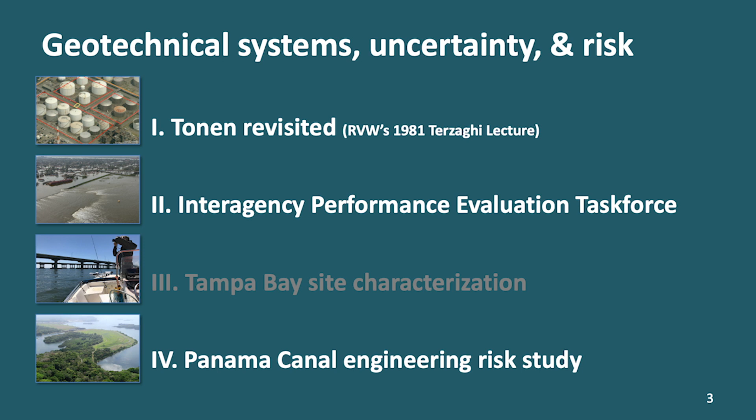And the third one is very recently, the Panama Canal engineering risk study. And the problem there was the canal is a huge, complicated system of engineered works, of capital investments. It faces a number of natural hazards that were unknown at the time of construction, but are now known, and others suspected. And the issue was how are the risks mitigated by operational decisions that the management of the canal can make. And so that was why the Panama Canal Authority was so interested in understanding risks.

So let's talk first about Tonen. So this is a recent picture of Tonen. Those three areas in green are large tank farm areas. Just to put things in perspective, you see these tanks there? Those are 50,000 kiloliters. I did a calculation the last time I gave this lecture. I think that's something on the order of 18 acre-feet, maybe 20 acre-feet. It's a lot. These are big. These things are divided into patios, which are separated by firewalls. There's a huge firewall revetment around the whole outside. There's a whole bunch of drainage.

And the issue is, how susceptible was this site to liquefaction? What was the probability that a loss of product off-site into the bay might happen? And what should the management of Tonen do about it? That is, how much money should they be willing to invest in reducing this risk? Because the risk was large. I'll show you how large in a minute.

And Bob thought we should really do it because he noted that this system of facilities could fail in a whole bunch of different ways. And we can't just go calculate the reliabilities of some footings or some tanks or something. We have to consider the system as a whole to understand the risks.

And so we decided, so I was over with Zenon this morning talking to his fabulous graduate students, and they have their own version of this picture, which I think of as the TVC picture, the threat, vulnerability, and consequence. This is now the standard way to do a lot of big systems risk analyses. It's been criticized in certain areas, but usually not in engineering.

And so we adopted this where the threat was the earthquake and the liquefaction, the vulnerability was the fragility of the tanks and the walls and all that, and then the consequences in this case were mostly fines, actually, mostly environmental fines if Tonen released product. So that got us off on a reasonably solid footing of organizing the uncertainties. That's sort of a theme here.

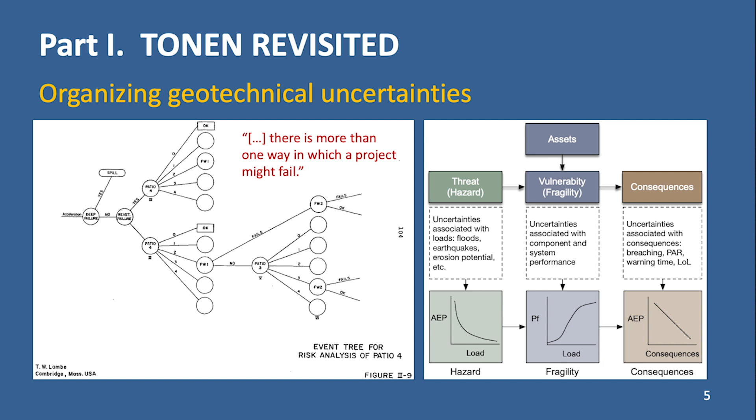The second thing we bumped into, and I think we learned some lessons, was the geotechnical data were really difficult to deal with. This is late 1970s. The only data we had were SPT blow counts, by which, given Harry Seed's work, Bob and others and Mishak were attempting to correlate those to liquefaction triggering. But look at these data over here.

This is the upper fill. This is a hydraulic sandy fill, and this is the in situ native alluvium. This alluvium is not too bad. This sandy hydraulic fill was the bad actor. But look at the coefficient of variation, right? The standard deviation divided by the mean.

It's about 50%. If you put those numbers in any probability calculation, you will find out that the site failed a long time ago, right? It's no longer actually standing there. So that couldn't be real, or at least it wasn't very usable. So we thought we needed some way of explaining the data, and we came up with this little cartoon, which has been used a lot. You see it around a lot these days, but this is where it originally came from.

And this divides out the uncertainty in those data into two pieces, into the data scatter that you actually observe, which was really large, right? And into systematic errors, which are much more dangerous, that you don't observe. So that is measurement bias, right? That is statistical error in the mean or in the spatial trend.

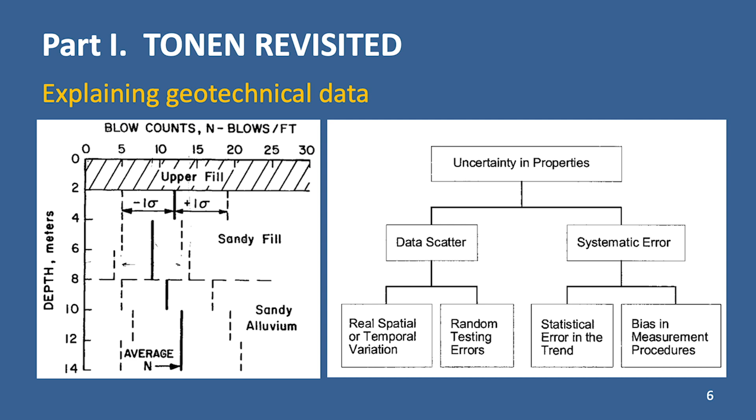And it took a while. It took the work of Don DeGroot, now at UMass, some years later to come up with good methods of separating those two, the noise from the trend in the geotechnical data. But I think today we have a good handle on how to do that. So that was the second thing. The second hurdle was explaining the data.

There was a bunch of other things we learned too, but these I think were the three that have stuck with us. And this cartoon, maybe some of you have seen before. I know Jean-Louis has seen it because we have had many, many talks about it. And this diagram has evolved over the years. They're much more elegantly drafted today, but the concept is the same, right? Along the x-axis is cost, consequence of a failure. Along the y-axis is a probability.

Now Allen Marr and I put this figure together over a long weekend with a few glasses of wine. Probably not as good as what Jean-Louis serves, but they were refreshing anyway.

And we weren't quite sure in those days whether we were talking about, for those of you who are in this world, big F N curves or little f N curves. That is, annual exceedance probabilities or annual probabilities. So this is regretfully a mix of both. Today we probably wouldn't do that.

And then we took a big heavy HB pencil and we drew those lines of two kinds of risk, things which people seem to accept readily and things which sometimes they accepted if the benefits of the risks were large. And we went to the Tonen management and we said, your annual risk is X. The annual risk was a lot.

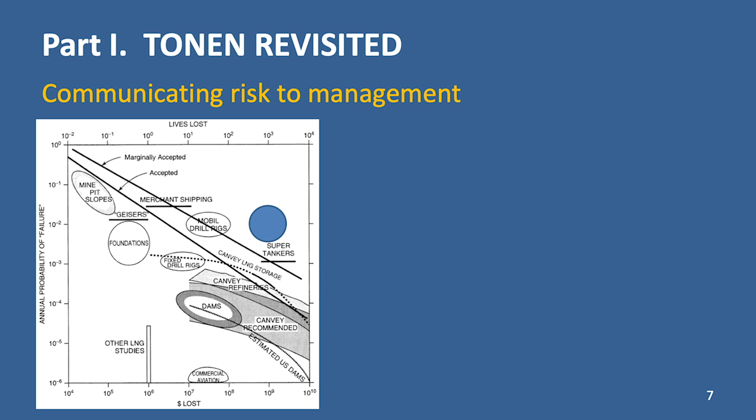So that was the purpose of this chart, and you will see this chart. It's usually called the Whitman chart, because Bob Whitman put it in his Terzaghi lecture. Allen Marr and I always talk about, this is one of those manifestations of Stigler's law of eponymy. Do you know this? Stigler is a famous historian of statistics at Chicago. Stigler's law of eponymy says that every great mathematical equation that's named after somebody is named after the wrong person. So that's Stigler's law of eponymy. Anyway,

so these are some lessons we learned. We learned some other lessons about spatial averaging and stuff too. Okay, a philosophical digression. There's nothing uncertain about geotechnical engineering. It's just that we don't know enough. No, there's nothing random about soil properties. They are what they are. We just don't know what they are, typically, or we only know what they are at a few points.

And this is a famous saying from Georges Matheron. You probably know Matheron, the famous professor at the Paris School of Mines who invented geostatistics. Probability is in the model, right? It's our conception of uncertainty. That's the probability. Probability is not in the ground. Geology is not uncertain. Unless you're a high-energy physicist, in which case maybe it is, but for us it's not.

The second thing we learned, uncertainty is in the mind, right? Uncertainty is not in the world. This is controversial. I'm going to make a pitch in about 5 or 6 slides that we should be thinking about uncertainty in geotechnical engineering in the sense that Bayes or Laplace thought about uncertainty. Uncertainty is epistemic, it's in the mind, it is not in reality. Reality is deterministic. Now, high-energy physicists don't believe that, but I believe that, right?

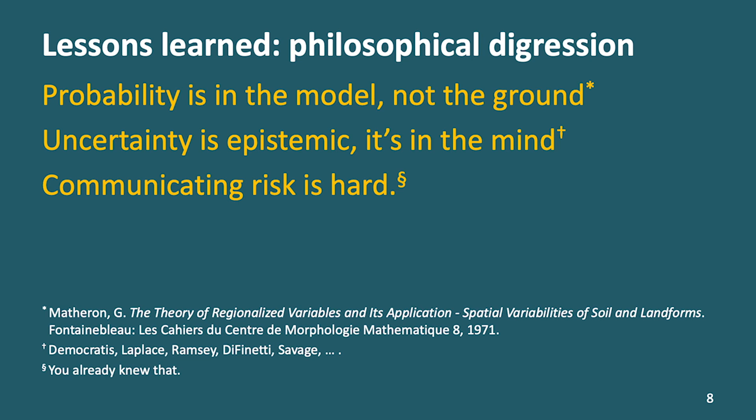I believe that if we really knew all the atmospheric conditions, if we knew all the boundary conditions and initial conditions, we'd be able to predict stream flow without historically going back and just doing statistical analysis, right? That's the Laplacian determinism argument. I think it's totally true of geotech, that our uncertainties are in the model, and they are not frequencies, they are in the mind. They're epistemic uncertainties. All right, enough for the digression.

Hurricane Katrina, this is interesting. This is 2005 through about 2010. Some of those people are known at least to some of the people here in the audience. Ed Link was the head of the IPET, and we all remember Louisiana. The question the chief of engineers presented to the working group on this project was, did the whole hurricane protection system, now called HSDRRS, which I can never remember what that stands for, did the whole thing work as a system?

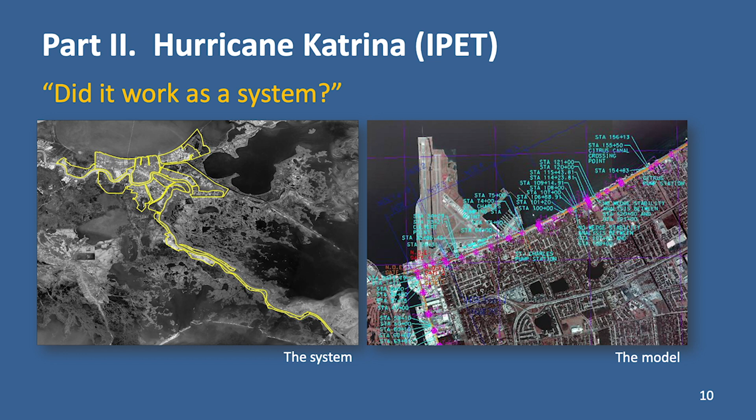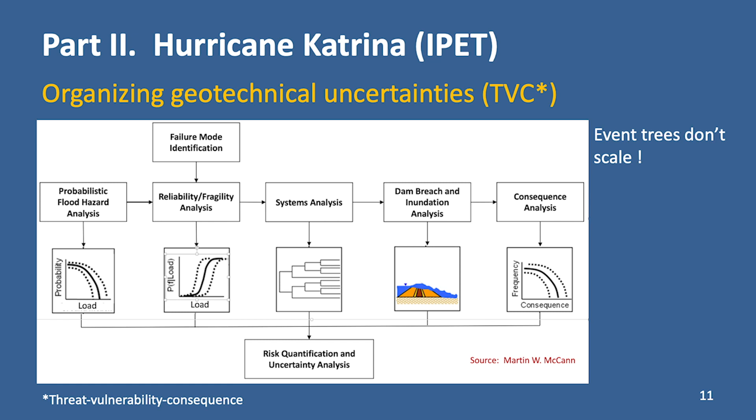Spoiler alert, a really painful lesson is that event trees seem like a great idea, but they don't scale at all well. The team that was doing the event trees ended up with event trees with between 3 and 4 million end nodes being done in Excel. I don't hear any of the students who are Python experts laughing, but you should be, because this was a disaster. By the time we learned that it was a disaster, it was too late, and so we had to continue on. Today, I think surely we would do this with simulation rather than doing it with event trees.

So the TVC approach seems to work. It continues to work. And like I said, even this morning I was looking at the research you guys are doing here, and you're using it pervasively through a lot of stuff. Another thing we learned on Tonin was that you can't redo everything. We can't reinvent the wheel. We couldn't go back and do exploration and slope stability and hydraulic analysis for 350 miles of levee. There wasn't time, there weren't people, there wasn't money. So we had to rely on the legacy, the archival analyses.

And not surprising, do we have anyone from the Corps of Engineers here today, maybe? Too bad, I was going to say, good for you guys. The Corps in New Orleans, they had every drawing they'd ever made on the levee system, going back to who knows when in colonial times. And they had every boring that they had ever taken all recorded and all electronically digital in databases. So we were able to build on the legacy analysis. It wasn't perfect, but it was what we had.

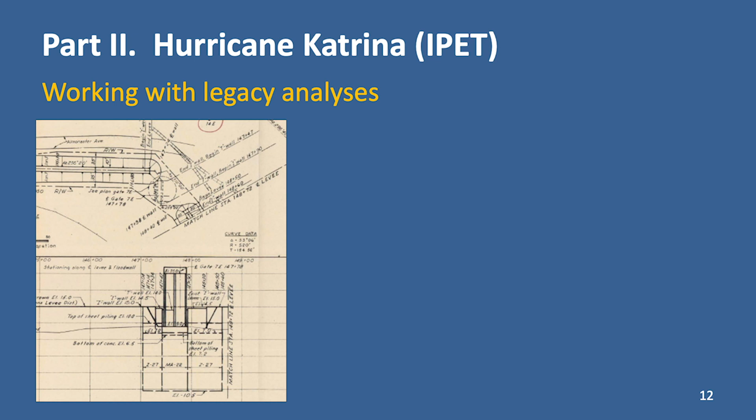And then one last thing that I think really came home clear on this was risk people talk about, I've already mentioned it, aleatory uncertainties, randomness in the world, right? So we often treat stream flows as random and inherently random. And whether they actually are or not doesn't matter. We can model them that way. It's sort of like modeling them as if you were modeling flips of coins. There's another kind of uncertainty which is dominant in geotech, which is we don't know enough, epistemic uncertainty, what we know. Certainly when we did Tonin, we just mixed those two together. We tried to be careful, but we mostly just mixed them together. Shouldn't do that. That's something we've really learned.

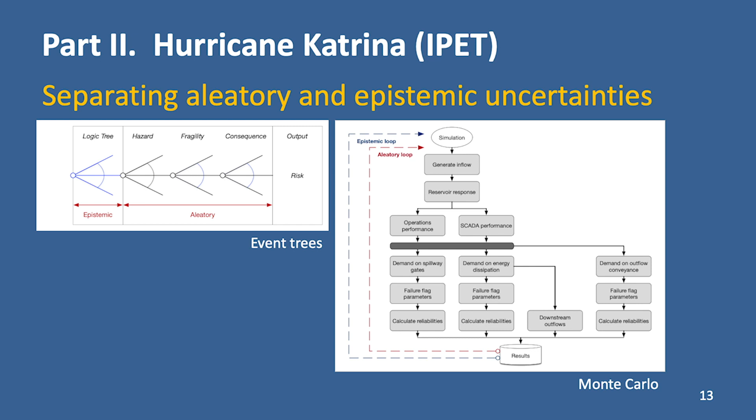I think today we're doing more of the stuff on the right-hand side, as is the Corps, where we do simulations, but we do nested simulations where we do the aleatory simulation, and then around that we nest the epistemic uncertainties. And that seems to work exceptionally well, and it's a heck of a lot more efficient than the left-hand side. Okay, one more picture.

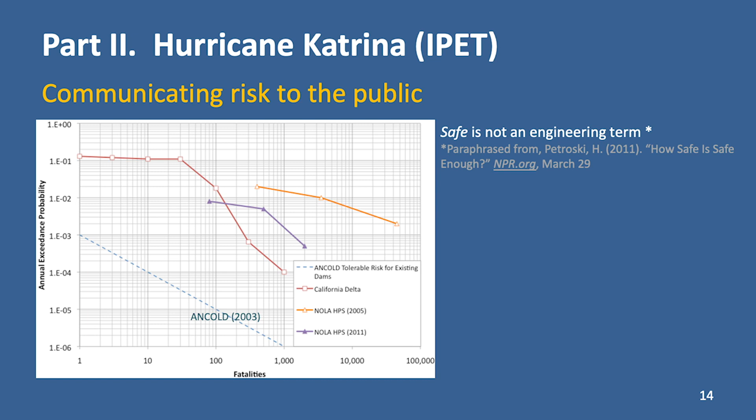Why is that purple line way up there near a 100-year return period? It's because by act of Congress, that was the safety level, okay? It has nothing to do with what engineers decide, and engineers shouldn't be deciding, okay? Anyway, that idea of FN curves has also evolved a lot over these decades.

Another digression. I used this term when I was here in 2019, and we got a big laugh in the audience. I don't hear anyone laughing today, but it's still true, right? The statistics you all learned in college is totally useless in geotechnical engineering. Why is that? First of all, the statistics you learn is all based on frequency. It's based on clinical trials. It's the statistics of political polls. It's the statistics of the national census. It's not the statistics that engineers use in trying to make decisions, and I'll tell you why in a minute.

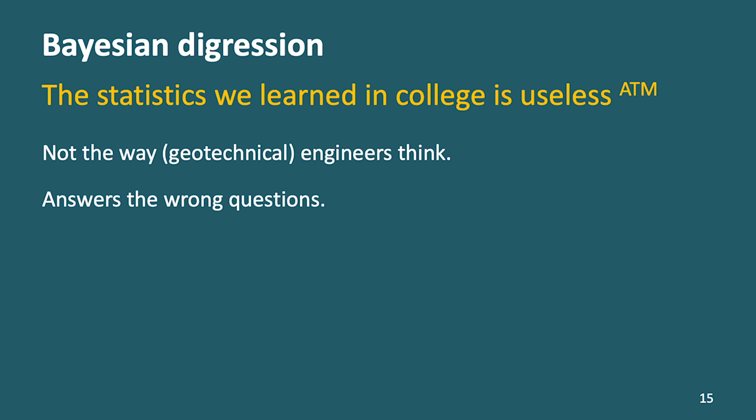Secondly, it answers the wrong questions. And here's the way we should be thinking. This is Bayes' theorem. And Zenon, where are you? Zenon showed me that you have Bayes' theorem embedded in your pavement out near the engineering school. Bayes' theorem is how engineers think, and it's the observational method. Bayes' theorem is the observational method. It's how we should be thinking about uncertainties in geotech.

And what this says over here, there's some probability that you have. It's, if you believe me, a degree of plausibility or a degree of belief, a degree of confirmation. It's not a frequency like flipping a coin. It's the probability that we assign to something being true. Is the model approximately correct? Are the soil properties approximately this? Is there a sinkhole at this site, right?

And we go out and we collect some evidence. In statistical jargon, we call that the likelihood. It's the probability of seeing the data you actually saw if that hypothesis, if that thing were actually true, right? That's the weight of evidence. All the weight of evidence is in that one term. When you multiply those two things together, you get an updated probability.

So you can see why this is how the observational approach works. We have an original appraisal of probabilities, we monitor the project, we get some new data, and then we update our uncertainties. And that denominator, you can forget it, it's just a normalizing constant. Most people today just numerically get rid of it, it's not important.

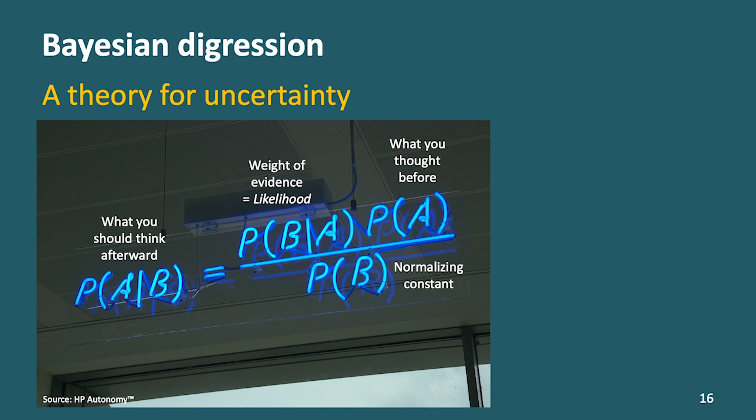The probability you learned in college is direct probability. It goes from a hypothesis: the state of nature is such and such. We don't know it, but we're just going to hypothesize that it is. Presuming that's true, what's the chance that we would have seen the data we actually saw? Well, in fact, what's the chance that we might have seen data other than we saw?

That goes into traditional statistical calculations of confidence limits and p-values and all that sort of stuff. That's direct probability, sampling probability. That is not actually, this sounds subtle, maybe it sounds meaningless, but it's not. It's really important mathematically and logically.

What we are doing is we see the data. The data are not random. We don't care what the probability of the data is. The probability of the data is 1. We saw them, right? We know those are the data. The question is, what's the inverse probability? If we've seen those data, what's the probability on the state of nature, on the hypothesis?

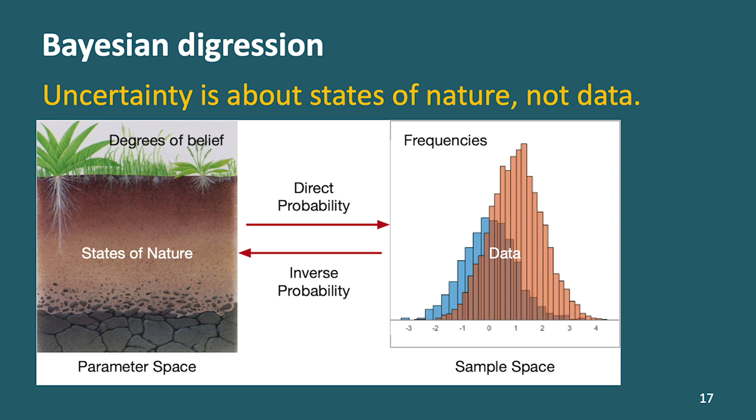So direct probability goes from hypothesis to data, which is not what we want to do. Inverse probability goes from data to hypothesis. Today, for shorthand purposes, we normally call that the Bayesian way of thinking about uncertainty and probability. And I would maintain to you that H&H engineers, hydrologists and hydraulics people, are all frequentists. They think of the frequency of stream flows, the frequency of rain.

Geotech engineers, I think almost to a person, are all Bayesians. We may not know it, but we are. We all think about going from data to what's the chance of the state of nature being something, right? And I would say for all of you structural engineers, most of my structural engineering friends don't really care. They only care if we're meeting code, right?

So, I'm sorry. You structural engineers can tell me off later if you want.

Okay, last quick example, and then I'll wrap up. So this is a project we just finished, the Panama Canal Authority operational and chronic risk study. The Panama Canal is just such a fabulous place and such an interesting, knowledgeable group of engineers working on it. This is Gatun Dam. Little travel log. This, when it was built, was the largest dam in the world.

The ASCE leadership said this dam could not be built and should not be attempted. But Theodore Roosevelt said, heck with the ASCE, and ordered the Corps of Engineers to build it, and they did. The downside of this dam is its hydraulic fill. And at the turn of the last century, in 1900, 1910, everyone thought that there were no earthquakes in Panama. Well, it turned out not to be true.

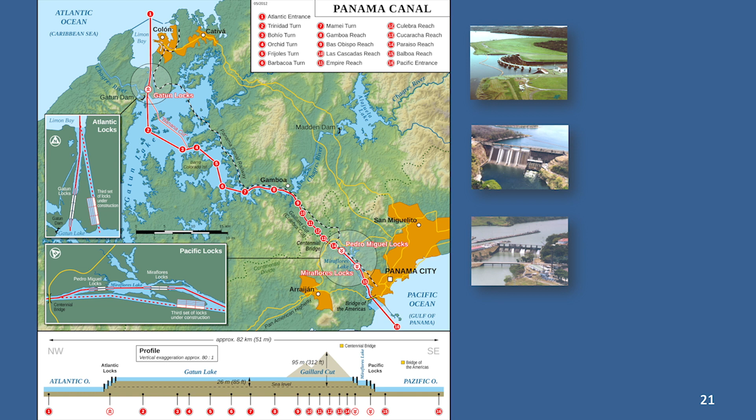And the issue is, what should the operations and the engineering teams at the Canal Authority be doing to mitigate these risks, to minimize them? This was a little bit different. This system is huge, right? It's huge and much more complicated than those other 2 systems.

So one of the first things we did, which I think in DC all the federal agencies do as soon as they're starting a big project, whether it's in construction or anything else, is they put together a risk register, right? A checklist of all the things that might go wrong in the project. This is just in Excel. Typically this lists 50 or 60 items. In this case, it was 600, but we narrowed it down to a few.

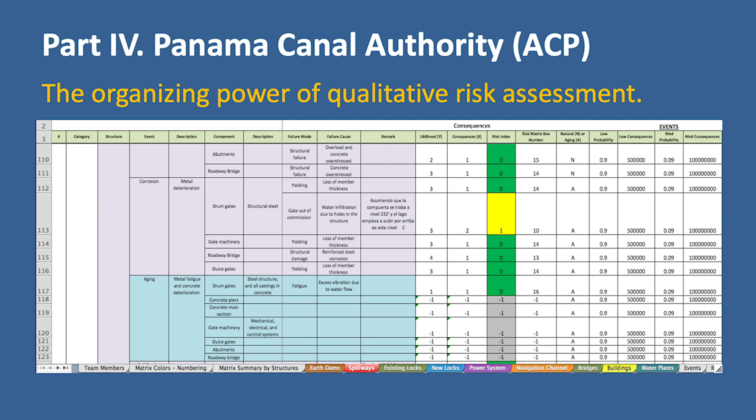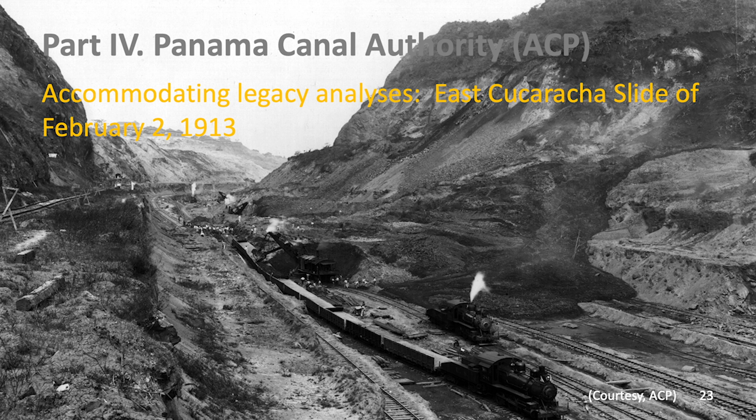This turns out to be an enormously useful thing. The dam safety people call this semi-quantitative risk analysis. It's just a checklist. So the organizing power of simple checklists and qualitative thinking, I think, can't be overemphasized. This is the famous East Cucaracha slide. This is one that Arthur Casagrande himself was a principal consultant on. We ended up having to use a lot of legacy analysis in this project. That's something that we've seen in a lot of these big projects, so you can't redo everything.

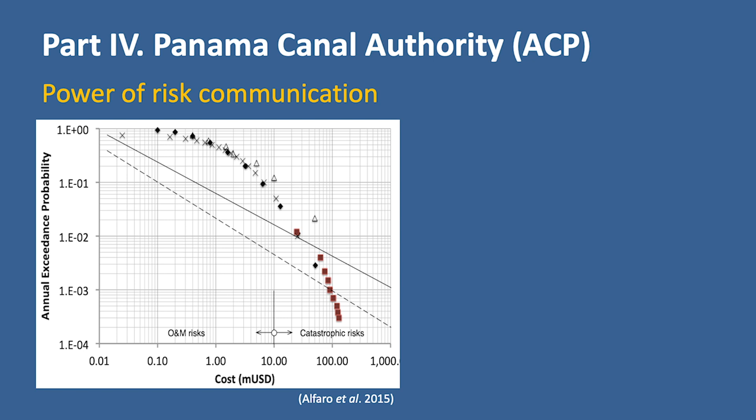Those are seismically induced slides. Even though everyone is really frightened of them, they're actually, from a consequence probability point of view, a lot less important. But communicating risk in this way really had a huge impact. Let me just show you one more slide, and then I'll wrap up.

This is a slide from Luis Alfaro, who is now retired, and was the vice president of engineering for many, many years at the ACP. This is how Bob Patev and I got involved, helping them with the chronic risk study, shortly after Whitman's Terzaghi lecture. Luis was the alumni of the year at Purdue a few years ago. Very competent, well-known engineer.

Luis came up with this way of going to the board of directors. Now, who's the board of directors? Mark, your board of directors probably has a bunch of engineers, but the canal is mostly lawyers and accountants and politicians, right, and the wives thereof.

And if we install this real-time, continuous, 24/7 monitoring system, capture all the data on computers, show it in our Star Wars geotech lab, we can probably lower our probabilities by about an order of magnitude. And on the basis of a communication picture as simple as this, he managed to convince the board of directors of the canal to invest several tens of millions of dollars in installing real-time monitoring, which continues to this day.

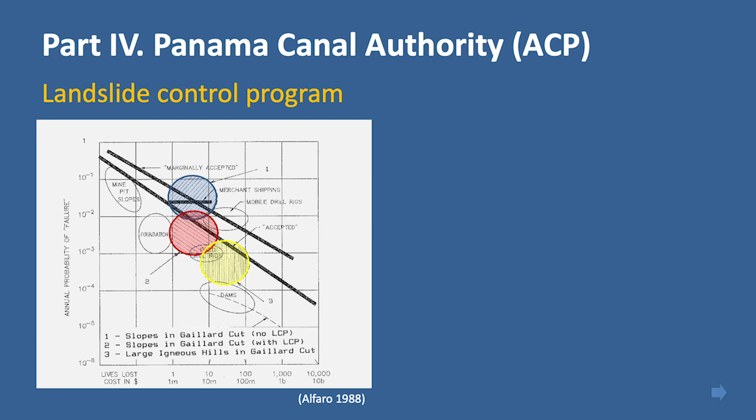And you can go into the geotechnical offices at the Canal Authority, at the engineering division, and they have all of these data, real-time, showing you the deformations and pore pressures and other things in the Culebra Cut. Okay, so let me wrap up.

Well, we've spent a few decades trying to appraise quantitatively the engineering risks on these large systems. And these large systems are engineering systems involving a large number of components which are all interacting. Failures can occur in a wide variety of different ways through combinations and permutations which are often hard to predict a priori.

But management, from the engineering point of view, often wants to have a sense of the size of these risks so that they can make reasonable financial and engineering decisions to reduce expected cost, to price out risk transfer. I haven't mentioned that, but that turns out to be a huge piece of all of this kind of calculation. How much should we be paying to transfer risks to someone like a reinsurance company, right?

I mean, this is not auto insurance where I go to Geico and they tell me it's going to be $300, take it or leave it. If you're the Panama Canal, there's room for negotiation on what you're going to pay for insurance. So how much should you be willing to pay? Should you go to the financial markets, and should you float catastrophe bonds and other ways to transfer the risk to other people? And if you do, how much are you willing to pay for it? So there's a lot of reasons for doing this.

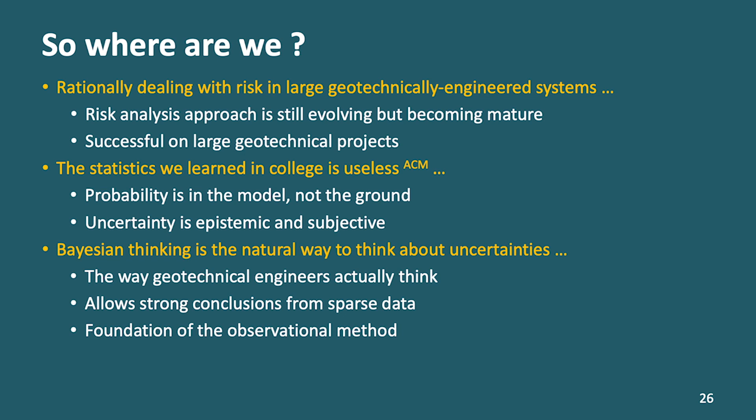Something I could not illustrate today, but I know several of the students here are probably well aware of it, is that this way of thinking, from a methodological point of view, mathematical point of view, actually allows you to make much stronger conclusions and inferences with much sparser data sets than does traditional statistics. And it is the foundation of what all geotechnical engineers pride themselves on, which is the observational method.

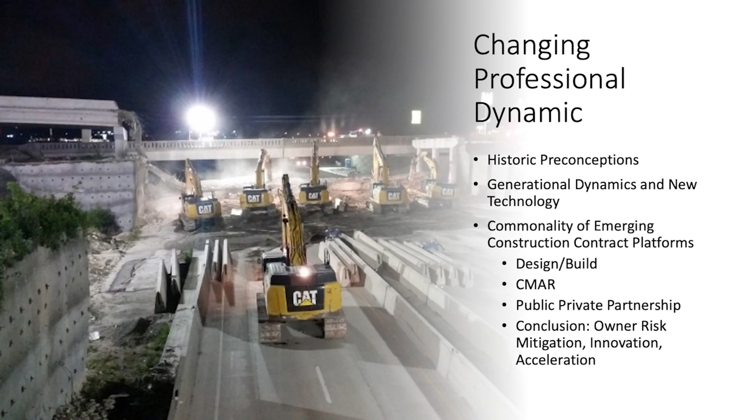But they're all, through the course of this, mitigating their risk. It has a big influence on the new contract platforms we're seeing. It has a big influence on the industry profit and loss. Why do I say that? Well, because in a design-build format, by the time you're bidding the job, all you have is a conceptual set of drawings. You're bidding on a concept and hoping that it's going to work out.

So you develop a risk register. Generally, on a traditional bid-build job, you'll have a risk register that may be 8 to 10%. If you get into a design-build job, that risk register changes quite a bit, because you're getting increasingly concerned about your relationship with the owner, your relationship with the engineer, your relationship with a joint venture partner, and the fact that you're basically putting together an estimate based on a concept.

You never even see 30% design by the time you're bidding these jobs. So you're rolling the dice. It's definitely professional gambling. And with that comes a contingency, right?

So I'm going to focus today on heavy civil design-build. That's really where I've had most of my experience. Personally, I like heavy civil. I find it more challenging than energy or petrochem, water, wastewater treatment. And they're all very interesting and they can be quite complex.

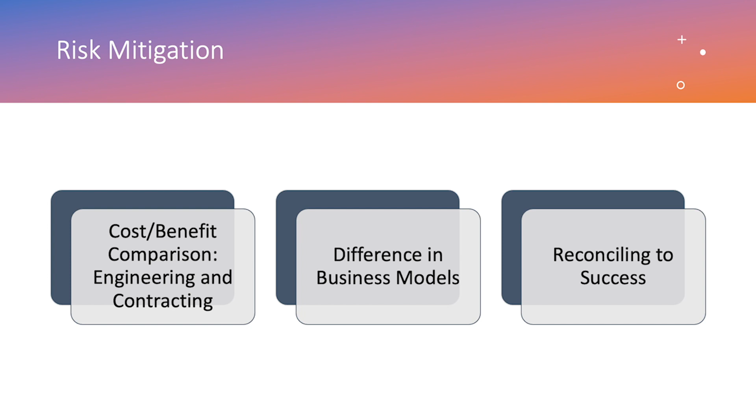Conversely, contractors are lump sum at risk, generally. And there's all sorts of platforms, all sorts of different perspectives on it, but the trick is to get to reconciling these different professions to a successful outcome. And so, look, there are lots of very positive examples of design build. And personally, I'm not so much an advocate of the public-private partnerships, but I'm quite an advocate of the design builds. And we see more and more of them. TxDOT, frankly, is lagging, but they're catching up.

Design build is a great platform, and I like it because it changes the relationship between contractors and engineers in a very positive way. If you can develop that relationship that is collaborative, cooperative, the engineers get the benefit of understanding that the two things in the back of a contractor's mind constantly are time and money. And those two things are never in the back of the mind of most public agencies. They just don't have the same budgetary drive or time drive.

And so it's quite revealing, I think, sometimes for the engineering community, because almost every sentence that goes by, it's either touching my time button or my money button, right? The engineers bring very insightful professionalism to the contractor's table in a design build. And so I think as time goes by and there's more collaboration and more cooperation between the professions, we're really going to see some dynamic, innovative projects.

I'm just a transient construction worker. I've been fortunate over the years because I have a passion for building. As a child, I always wanted to build stuff, and now I just get bigger toys, right?

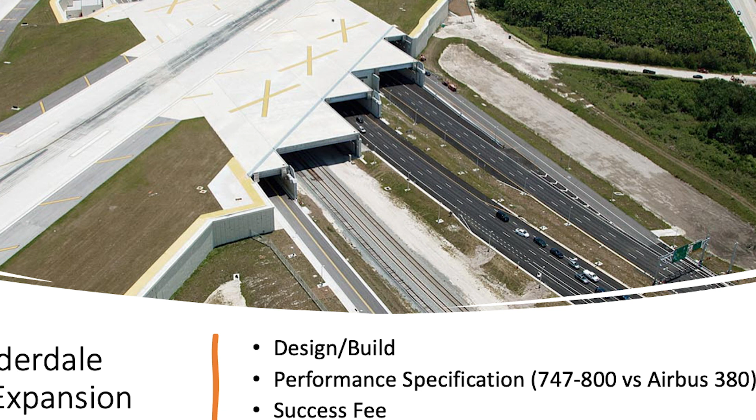So this is a better view. Here you are on close approach. You're in your little airplane, and look at where you're landing. I mean, you are landing right on these structures, okay? So let's talk about this performance spec. 747-800, it weighs 495 tons. An Airbus A380 weighs 589 tons. So you're almost 100 tons heavier coming in for a landing on top of these structures.

It involves 3,600 piles. So when they amended the performance specification, the contractor kept going back to the engineer. We good? Are we good on these piles? Yep, we're good. Okay, well, this isn't going to be an oral conversation. Here's a letter. Are we good on these piles? Yep, we're good.

3,600 18-inch by 18-inch piles. We bid the job. We got the job. $500,000 success fee goes out the door. Engineer comes back and says, oops, we got a mistake. Those piles are going to have to be 24 by 24. All right, so 18 to 24, I'm not very good at math, 25%. No, not exactly. 33% bigger piles.

You're analyzing these piles, and it's very much an art because you're not going to hit a point of refusal. You need to find that perfect interaction, and then you got to leave the zone entirely and go drive piles someplace else, wait 7 days. Now let's see what it does. Boom, it's holding. Good, you got your skin friction, you're all set to go. But these piles are 3 feet away from one another.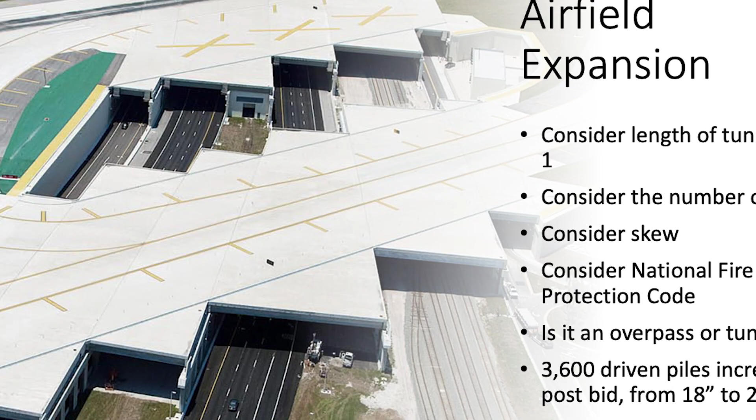So kind of my point here is I always keep an eye toward the end game, the long game. What are we doing? Because so often we get kind of interested in the puzzle, and we're going to solve this puzzle, but we've got to drop back and keep a perspective long term about what happens if we just go straight across instead of running it askew. Okay? Now, maybe from an engineering perspective, these beams are very close to one another. Maybe on a skew, the beams are too, I don't know. But what I do know is that going to turbines was about $6 million.

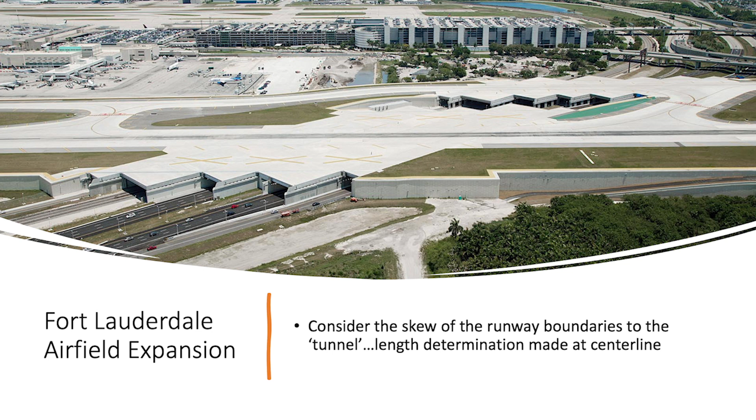And again, this is just consider the skew. This gives you a little better perspective of what the lengths of these underpasses transformed to tunnels ended up being.

So the takeaways here, take the performance specs very seriously, especially if one shows up in the 11th hour. Maybe I'm not cynical, but maybe I'm just very cautious. If some addendum shows up 4, 5, 6 weeks, I don't know if there's an ulterior motive or not, but I can guarantee you that I'm paying really close attention to design-build addendums that show up in the 11th hour, right? And also stay cognizant of the big picture.

I apologize, I'm trying to kind of accelerate just a little bit because I've only got an hour.

The other one is the Alaskan Viaduct Tunnel Bore Project. It's a big project in Seattle. I say big at the time, pretty good size, $1.4 billion. This is more of an example of contractor error. There was one minor thing that we're going to talk about, I say minor in relative terms, with respect to the engineers, but this is a great project. I love the tunnel bore projects. This one was particularly challenging.

And in this one, I want to emphasize, look at the nature of the joint venture platform. This one had a majority joint venture partner, international, with a minority national. And the cultural differences really came to light quickly on this job. And a lot of JVs are handled in a broad assortment of different ways. Sometimes it's just a financial arrangement, and one of the partners is going to build the majority of it. Sometimes it's a need to have a local partner because of certain advantages you would get from a DOT in a given state. Sometimes they divide it by scope.

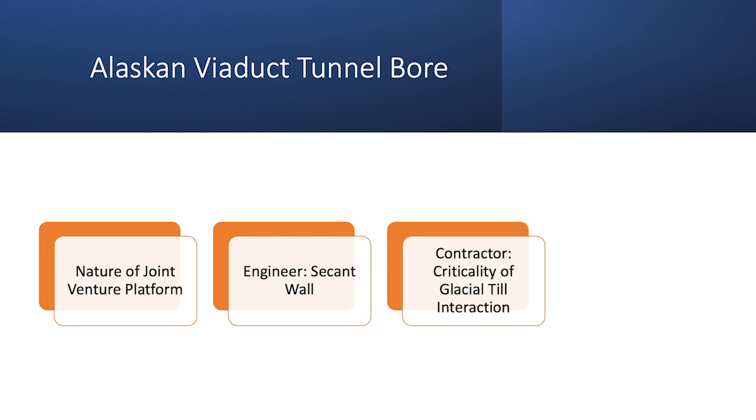Accountability. You know, nobody's perfect. There's no such thing as a perfect design. There's no such thing as perfect execution in the contract. But the traits that I saw in my grandfather and I see in Dr. Briaud, ethics, accountability, are critically important for long-standing relationships for every party to every contract,

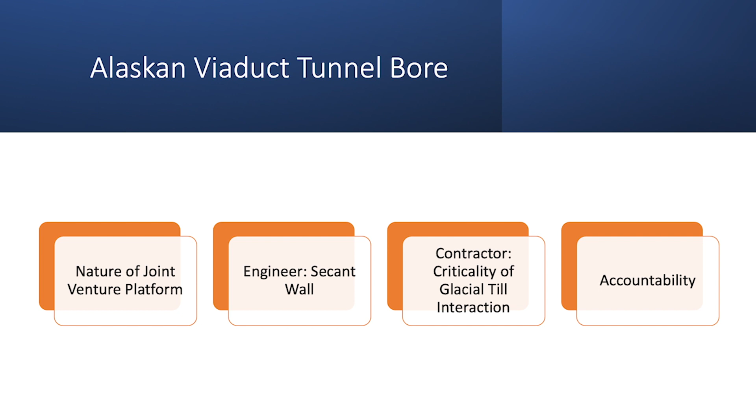if you deal with one another with an equal level of commitment towards success. And frankly, I carry this in my personal life: equal levels of commitment create the best relationships that you can have, personally, professionally, anywhere. When you get involved in a big multi-million dollar, $1.4 billion project, it's sometimes easy to overlook accountability and ethics.

So I'm going to whip through a couple of pictures fairly quickly. I kind of like this picture. Here you can see that the tunnel bore entrance has been developed with a secant wall. You can see the modules from the tunnel bore machine. At the end of the day, the tunnel bore machine is 360 feet long, roughly 60 foot in diameter.

At bid time, we put in $50 million for this TBM. Ultimately, the managing partner, who had the mining, wanted the more Cadillac TBM. It was an $82 million TBM from Japan, the largest of its kind ever built at the time. Very reputable company. And it remarkably has one use. In many tunnel bore jobs, the owners are always going to specify you get to use it one time.

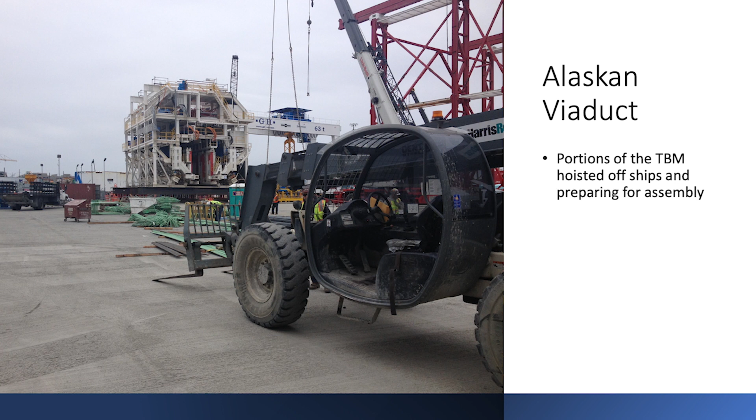Just a couple of pictures to walk through. There's one module of the TBM showing up by ship. It's critically important to offload those ships right away. The demurrage is incredible, and if you don't get right on it within 3 days, that ship goes back out to sea. Another fairly interesting shot of the module. I don't know if you can see them very well, but these are the trucks or rollers that the TBM goes through as it creates the tunnel.

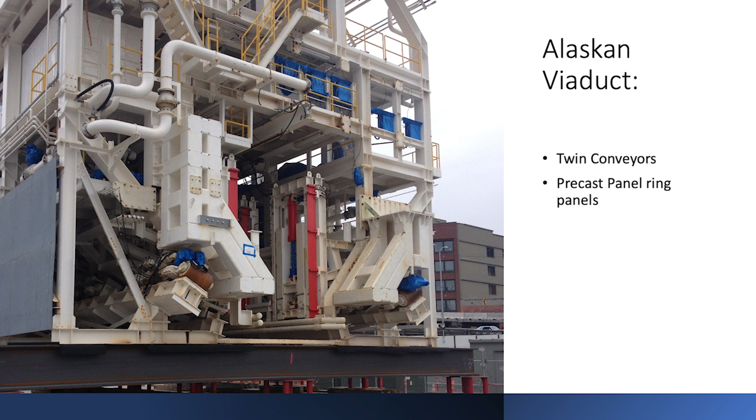There are 2 conveyor belts in this TBM. One extracts the soil and the excavated material. The other one brings in precast concrete panels. They are pneumatically grabbed and set in place. An entire ring will be installed. The tunnel bore machine reaches out and literally pulls itself forward. All right, the cutter teeth on the gear. So that's what it looks like. It was beautiful when it came off the ship.

We basically ended up having to replace all the cutter teeth 1,000 feet into the mine. It should have gone all the way through. That was the first red flag. Why are the cutter teeth going away so quickly? This machine's not designed to back up. It only goes in one direction, and it's forward.

So backing up this TBM to get access in there, and of course you're mining, so you're MSHA, not that we would ever ignore any safety requirement, but the safety is very intense, and you've got to figure out how to back up this TBM and replace the cutter teeth. The cutter teeth were the cheap part of the deal, $4 million. Okay, so we get it all done. The majority JV member goes back to mining. They get about another 500 feet in, and it quit working.

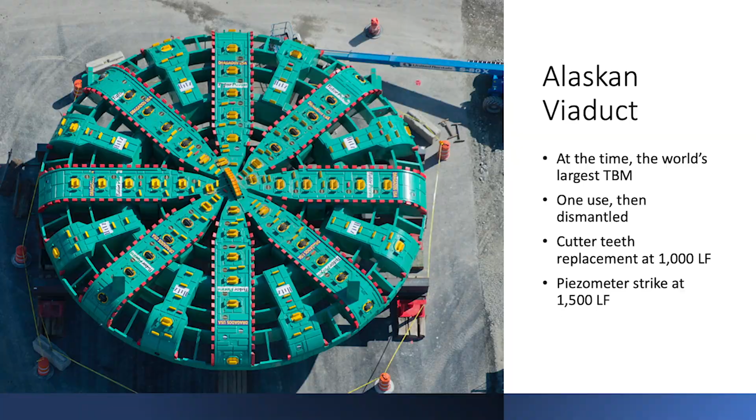So everybody was breathing a sigh of relief. You know what? It's still under warranty. So the manufacturer shows up in their nice pressed white jumpsuits with briefcases, and they pulled out 6 black boxes from this TBM, not unlike black boxes you'd find on aircraft. They record every input, every pressure, everything that's going on with that TBM. Well, the TBM was operated outside the manufacturer's recommendation, no warranty.

Now what? You've got a TBM that's underneath downtown Seattle. You have to excavate 120 feet to the top of the TBM. You have to figure out your shoring. You have to excavate down. You have to pull off the cutter head. And guess what, man? They don't have cutter gear sitting on the shelf. So you have to get new gear, put it in, put back the cutter head. It took 2 years at $100,000 a day in liquidated damages, constantly clicking by every single day.

So here's the entrance pit. There were an abundance of engineering issues, but I gotta say that the engineering teams worked really well with the contractor team. This issue caught them by surprise. The secant wall for the entrance shaft. You can see, well, I guess it's really difficult to see in this picture. The diameter of the shafts is really large, too large.

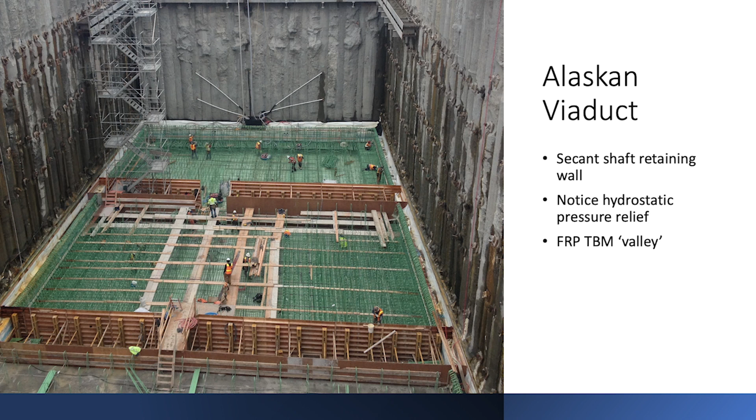The engineers got behind on their delivery schedule. What did they do? They threw in a 5-to-1 factor of safety. Well, okay, we had no choice but to go, go and build it because the tunnel boring machine was on the ships coming across the ocean. There was a delivery schedule.

But the point is, stay very, very cognizant of delivery schedules, especially in design builds, because there's a lot of money at stake. And jumping into a 5-to-1 safety just to get something out there, okay, that may solve the immediate problem. But the contractor's likely to come back and say, look, that costs an awful lot of money.

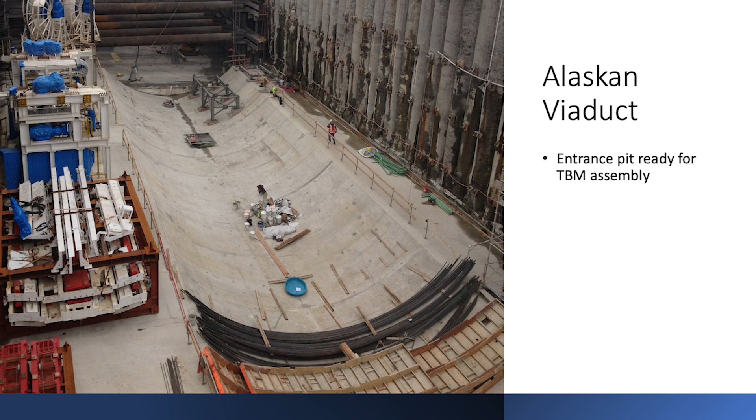So I'm going to fly through a few pictures. There you are, putting in the belly. You can see the secant wall. Obviously, there's a good deal of hydrostatic pressure going on here. A lot of tiebacks involved. A very interesting forming system to get that concrete at that shape inverted and trying to keep the forming system from floating.

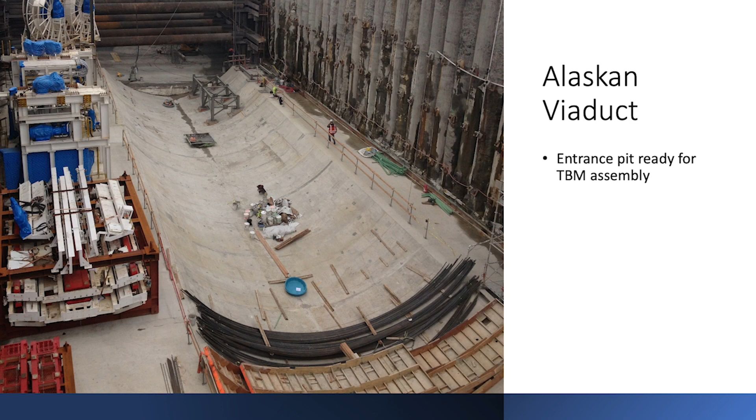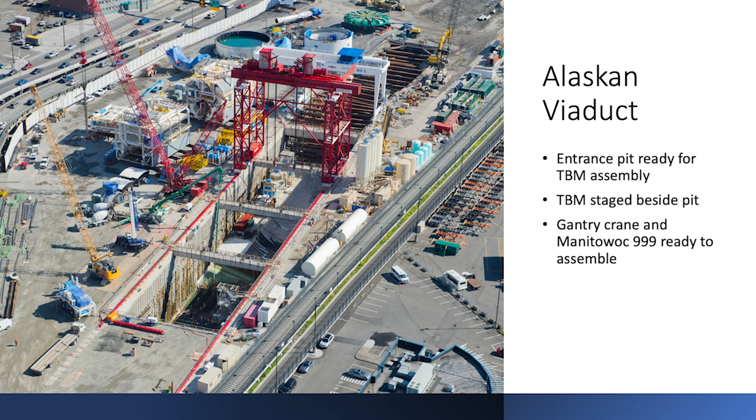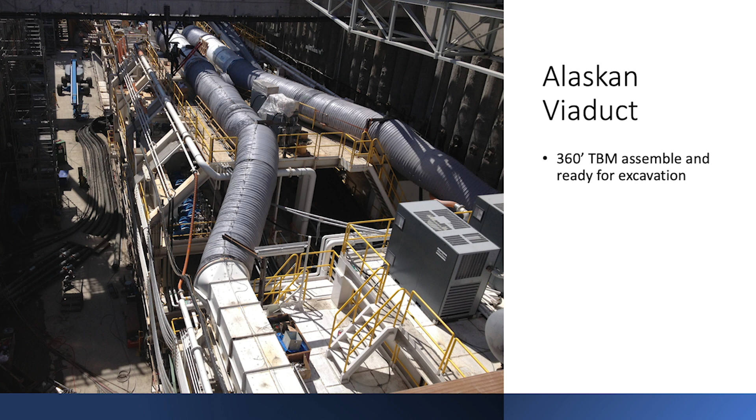You've got the gantry crane, a Manitowoc 999, which is always a fun crane to be around. You can see several of the modules all staged and ready to go. This next picture, the TBM is now basically put together. It's 360 feet again. So I'm going to stop on this one. I always like this picture. It gives you an idea of the magnitude.

So what's happening inside this tunnel is there's a double deck of 2-lane highways. There's a lower deck with a highway, and a highway up on top, 2 lanes each way. I've already gone over losing the cutter teeth at 1,000 feet, losing the seal at 1,500 feet.

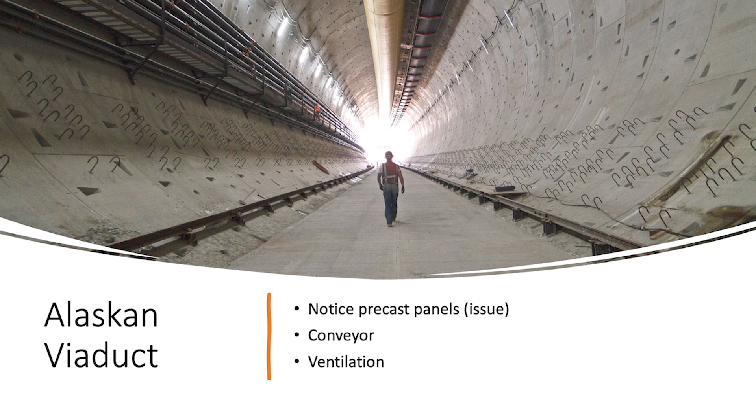Why did they lose that seal? Okay, well, we've got an idea from the manufacturer, but what did the majority contractor say? Well, it said that we hit an undisclosed thin wall piezometer pipe. All right, look, steel is not good on cutter heads, I get it. But a 10 or 12 inch thin wall piezometer pipe really is going to stop that machine?

But frankly, that's all they had, and they ultimately claimed against WashDOT for $642 million. And then mysteriously, the evidence kind of disappeared, and that claim dropped down to $337 million. And WashDOT recently was awarded $57.2 million for the delay.

But this is all money and this is all lawyers coming to the table doing their deal. What it doesn't address is 2 years of delay and a loss of time in the public eye. You start to lose confidence when things like this happen.

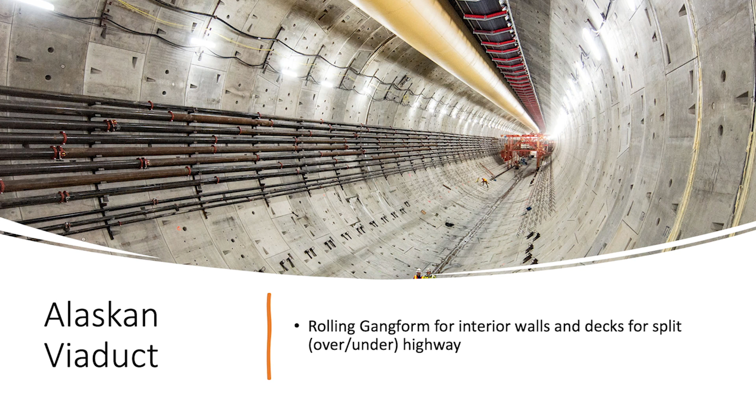So then the minority contractor gets to do his deal. You can see that he's got his rolling gang forms. He's going to move through and build the walls. I say he in a very gender neutral way. We had quite a team that involved a bunch of men, but a bunch of ladies who were very competent on this job. So we have this rolling gang form system for the walls.

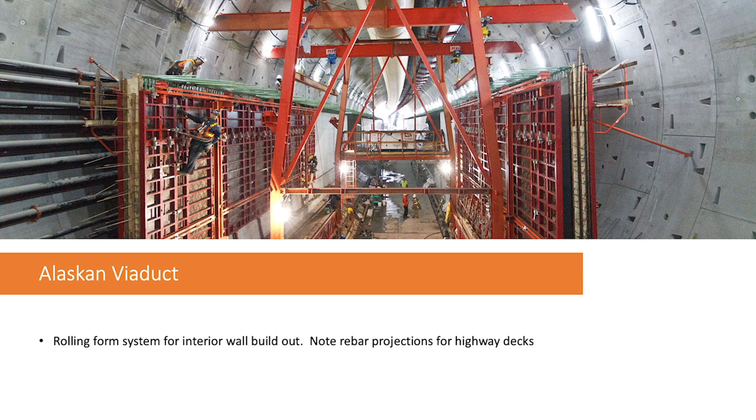This is where the tunnel bore finally came out. That's a little better picture of the gang form system. You can tell what they're doing with the walls. You've got your dowel bar projections for the upper deck. You can see the dowel bar projections. The walls are now done, and we're working on the roadway entrance, so the approach and departures for the actual structure. There's the upper deck going in.

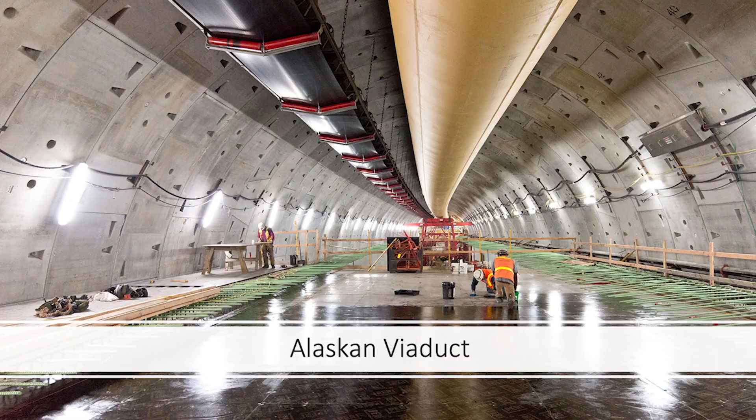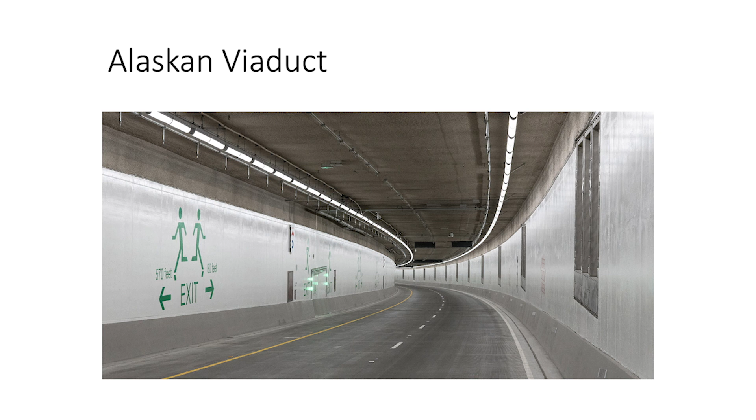Getting close to done here, and there you go. The beauty of this really for downtown Seattle is that the existing elevated Alaskan Viaduct was right on the coastline. And once this was put in and activated, they were able to demolish that bridge, which was in serious structural jeopardy by virtue of the earthquakes and seismic activity. And now it's all a park.

So when you go to downtown Seattle, it's just stunningly beautiful, anywhere from downtown to look down to this area. And it took too long, but it's nice. Lessons learned, and then I'm going to move into the one that I really am concerned about and would like to share today.

Okay. The engineers need to stay really cognizant of the schedule. The only real fly in the Chardonnay was getting the secant walls in there, and we spent a lot of money on the entrance pit. Contractors should very well understand their JV partner, and what I'm talking about there is understand the cultural differences, understand what the backlog looks like. Are they in need of additional work? How are they doing? Look at how many different JVs they've done with the same partner. That's a very telling thing.

I mean, examine these things, because if you get involved, you're going to be involved for the duration of the job. And tough jobs don't get easier, right? They get over with, but they don't ever get easier.

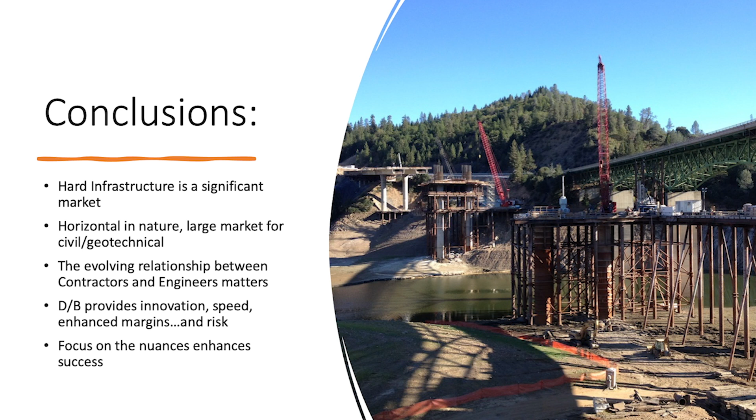The evolving relationship with engineers and contractors is getting better and better every day, and it's really a pleasure. It's very insightful to me. Design build gives you the innovation speed, but you also get risk. And then I'll wrap it up. Understand the stakeholders. Understand their motivations. Why are they even interested in this job? Have a pretty good understanding of your own motivations to get involved with this job.

Take a close look at the design coordinator expertise. Subcontract platforms, make sure you get the limitation of liability in the teaming agreement. Make sure that the teaming agreement has a relationship with the ultimate design agreement, i.e., we go into design agreement, the teaming agreement's done. It's superseded. It's gone. Active participation in the scheduling, active participation in the estimate. I'm referencing Read 1 and Read 2 here.

Generally in a design build, if it's a joint venture, the two partners develop their estimate and their schedules ostensibly in a vacuum, and they meet together for Read 1 to examine one another's approach to the job and to try to reconcile differences. They come back for a Read 2 to see if they're tight on the number, and then they agree to go, right? To the extent it's possible, from an engineering perspective, get invited to that meeting and attend and pay attention.

Understand the conceptual nature right at the beginning. Watch out for the success fee pitfalls. I really don't know what happened on Fort Lauderdale and how they became so enamored with success fee that they didn't consider 100 additional tons hitting the threshold of an aircraft. Watch out for the performance specification, especially if it shows up late.